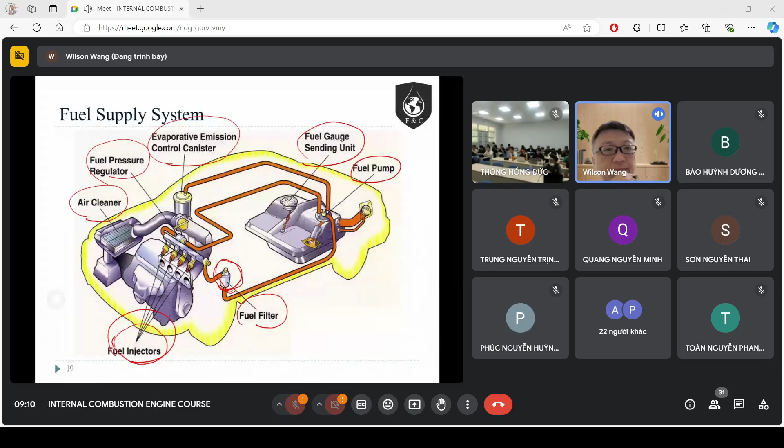And the injectors make sure the fuel can be atomized properly, because fuel has to be atomized properly in order to mix with the air, to have a good combustion. So that's the fuel supply system. And then the ignition system.

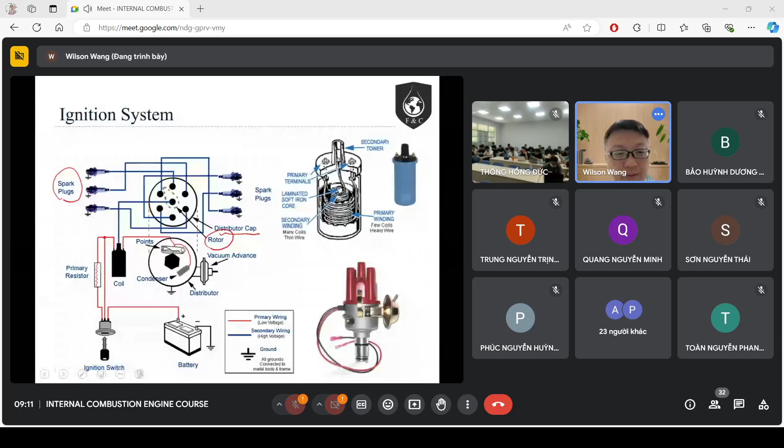So the ignition system includes spark plugs for the SI engine. And there's a distributor cap and rotors. That's the ignition system. And then the cooling system.

So most likely they have a downflow radiator, and there's a water pump, the coolant jacket. Then there's a thermostat, to tell you what the temperature is now, which you can see on the indicator in front of you. If you see the temperature is too high, it means your cooling system has some problems.

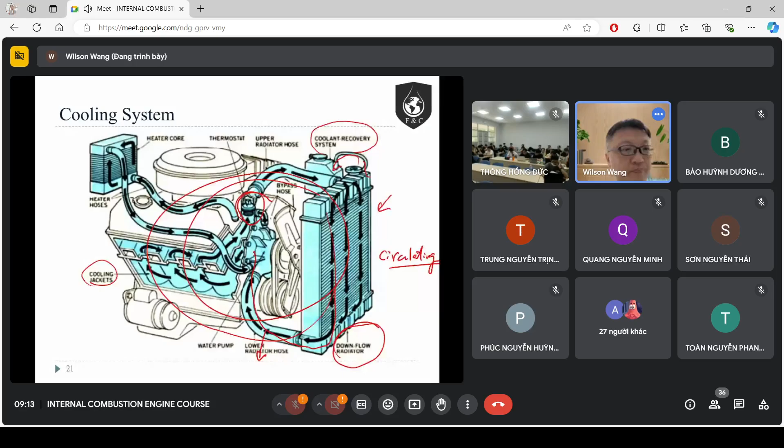The coolant is circulating. So mostly the coolant is running like this. So if you find your coolant has disappeared, it means there is some leakage from your cooling system. And another one is the lubricating system.

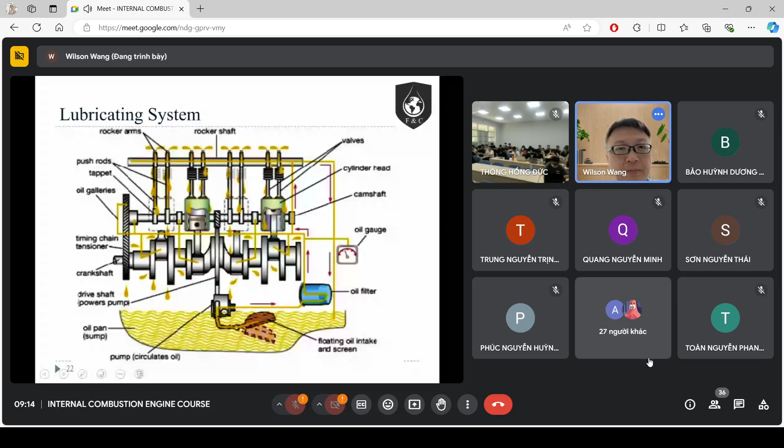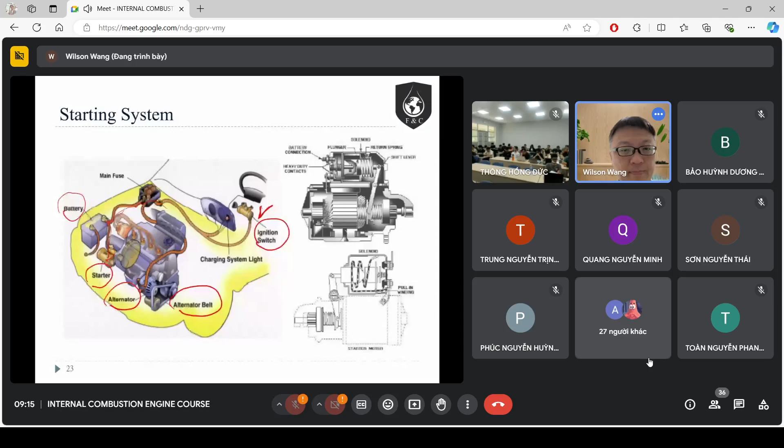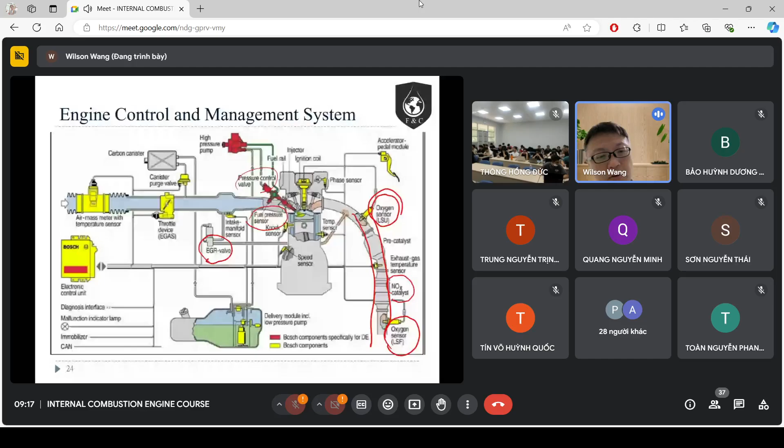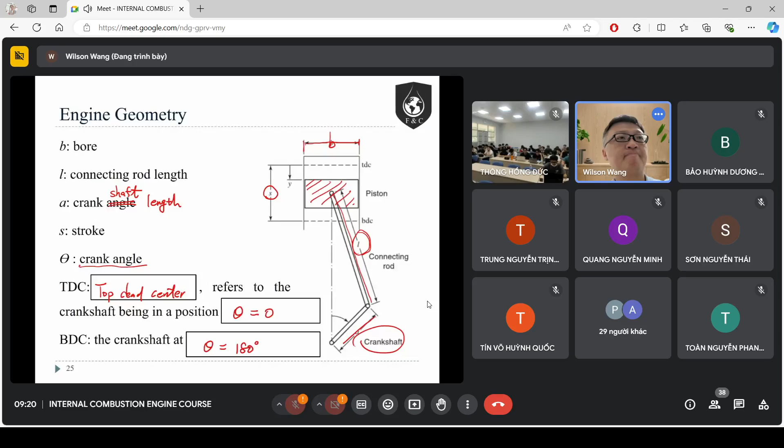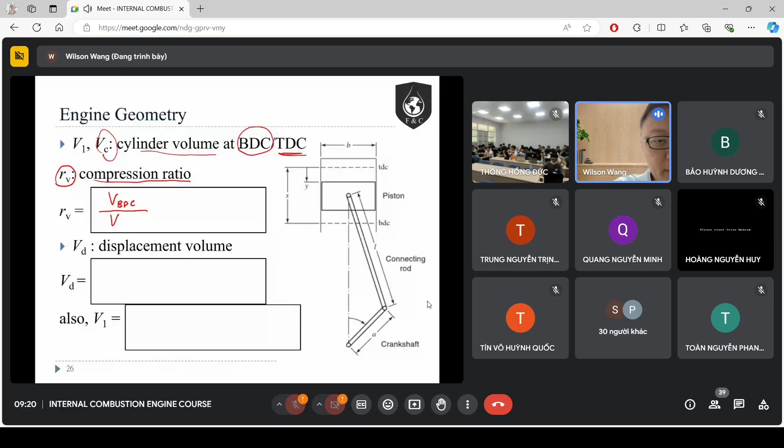Okay. So we have the V1, which is the cylinder volume at bottom dead center, and V sub C, which is the cylinder volume at top dead center. Okay. And we also define rv as the compression ratio. So this compression ratio is the volume at BDC divided by the volume at TDC, where the volume at BDC is V1 and the volume at TDC is V sub C. So that is our compression ratio.

And then we have V sub D, which we call the displacement volume. This displaced volume is the volume at BDC, bottom dead center, minus the volume at top dead center, which is the biggest volume minus the smallest volume. So this is the volume of the displacement. You calculate the volume of the cylinder: that is pi over 4 times B squared, where B is the bore, times the stroke.

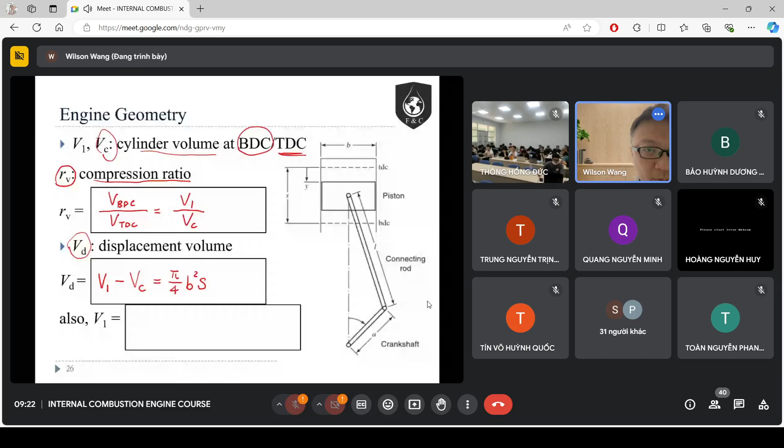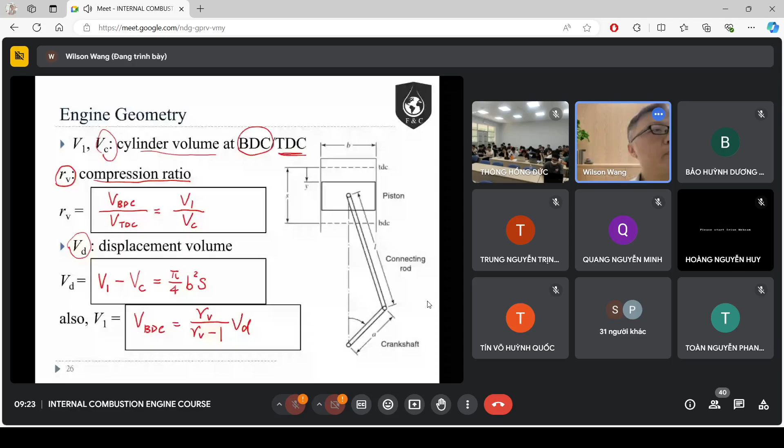Okay, also V1, which is of course V at BDC, is the compression ratio divided by compression ratio minus 1, times the displacement volume. And then N sub C represents the number of cylinders. So the total displaced volume is also equal to the number of cylinders multiplied by the displacement volume. So it's N sub C times pi over 4 B squared S.

And there's U bar P, the mean piston speed, which is 2 times N, the engine speed, times the stroke S. So the mean piston speed reflects that the piston travels a distance of twice the stroke per revolution. One stroke, two strokes, that's a revolution. So what is the speed it's traveling for this revolution? That is our mean piston speed. And omega is the engine frequency, which refers to the rotation of the crankshaft.

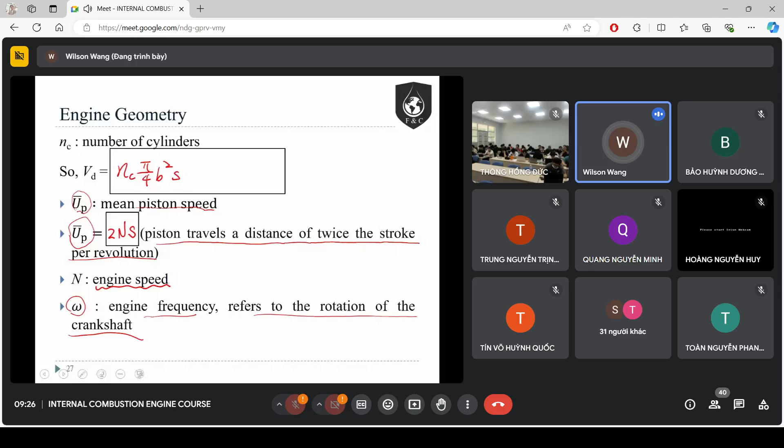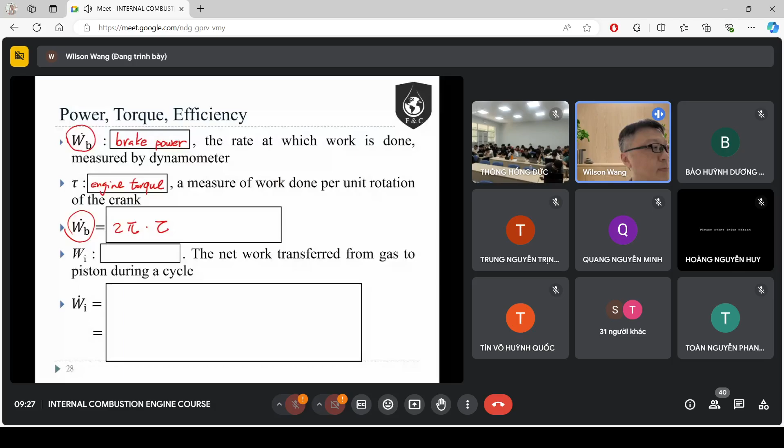Okay, then the power, torque, and efficiency. The power, W dot B, we call brake power. It's the rate at which the work is done, measured by a dynamometer. And tau refers to the engine torque. It's the measure of work done per unit rotation of the crank. So the brake power can be calculated by 2 pi times tau, the engine torque, multiplied by the engine speed, because torque is per unit rotation. So the engine speed multiplied by the work done per unit rotation multiplied by 2 pi. That is our brake power.

Okay. And there's WI, which we call the indicated work, the net work transferred from gas to piston during the cycle. For a four stroke, the indicated power is the number of cylinders multiplied by the indicated work multiplied by the engine speed divided by 2. If it's a two stroke, it's the number of cylinders multiplied by the indicated work multiplied by the engine speed. Okay.

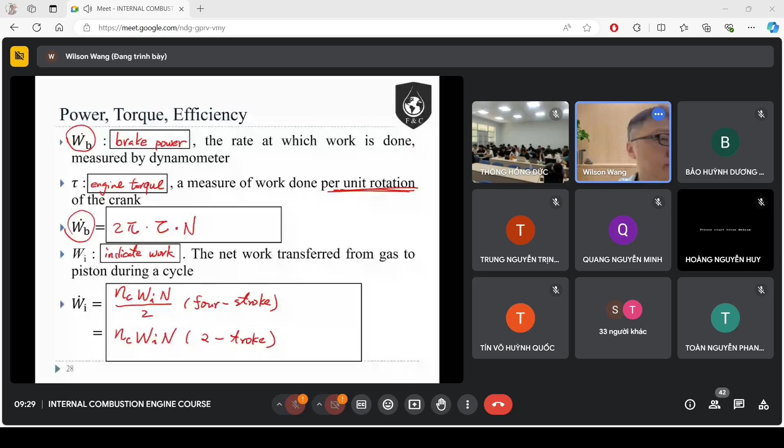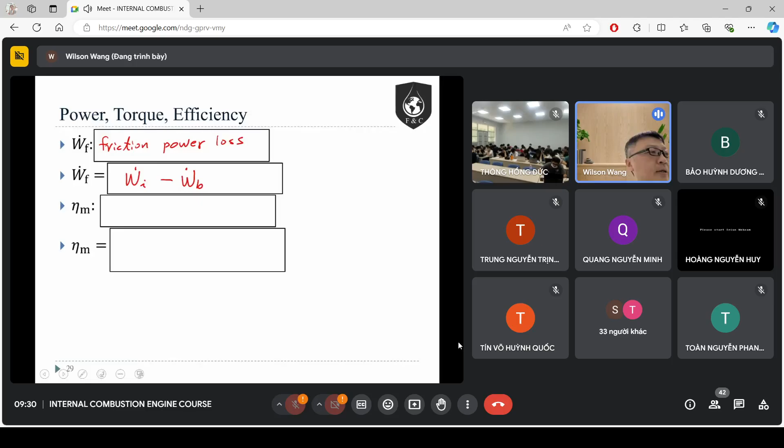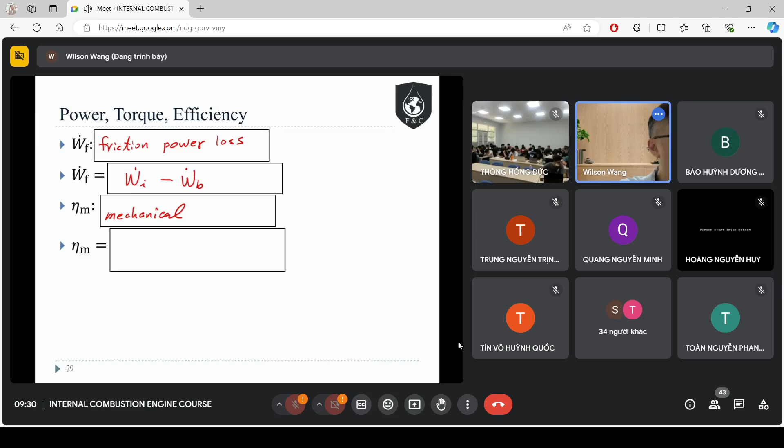We also have W dot F, the friction power loss. That is the indicated power minus the brake power. So the difference between the indicated power and the brake power is our friction power loss. And eta m is the mechanical efficiency, which is the brake power divided by the indicated power. The indicated work is the net work transferred from gas to piston during the cycle, the one you're expecting. The brake power is the rate at which the work is really done, measured by the dynamometer. So the difference is the friction power, a power loss. So this is also equal to 1 minus the friction power loss over the indicated power.

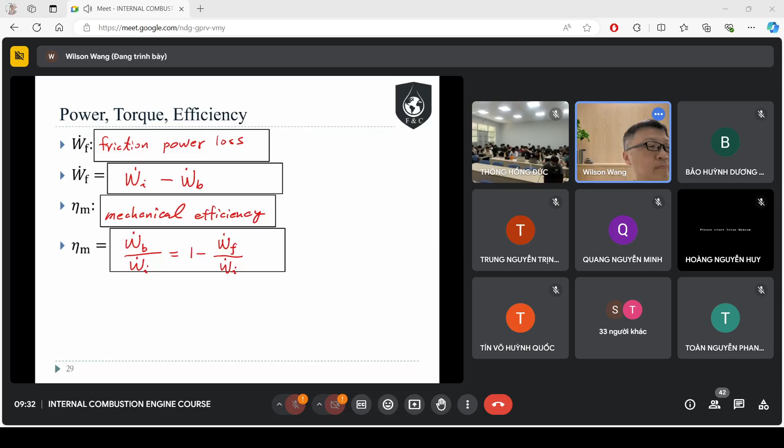And then there's the mean effective pressure, MEP. The MEP is the work done per unit displaced volume, in units of force per area. If it's the indicated mean effective pressure, which we call IMEP, it is the net work per unit displacement volume done by the gas during compression and expansion. That's the IMEP.

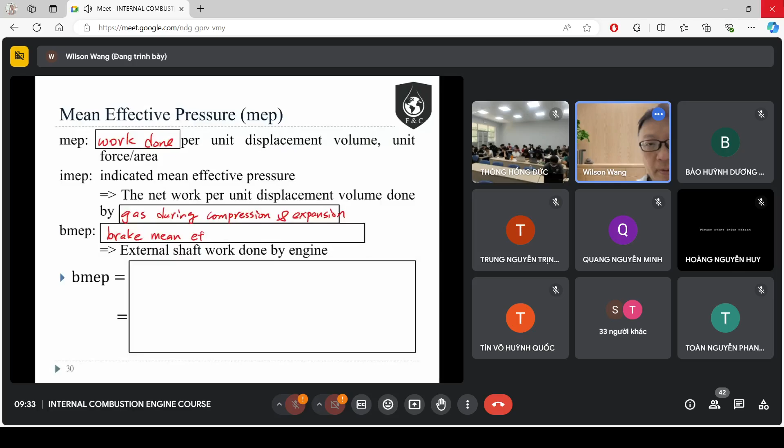Okay, then BMEP is the brake MEP, based on the external shaft work done by the engine. So for MEP, we have IMEP, the net work by the gas during compression and expansion, and if it's the external shaft work by the engine, it's BMEP. This BMEP can be calculated as 4 pi multiplied by tau, the torque, divided by the displacement volume. This is for four-stroke. For two-stroke, it's 2 pi times the torque divided by the displaced volume.

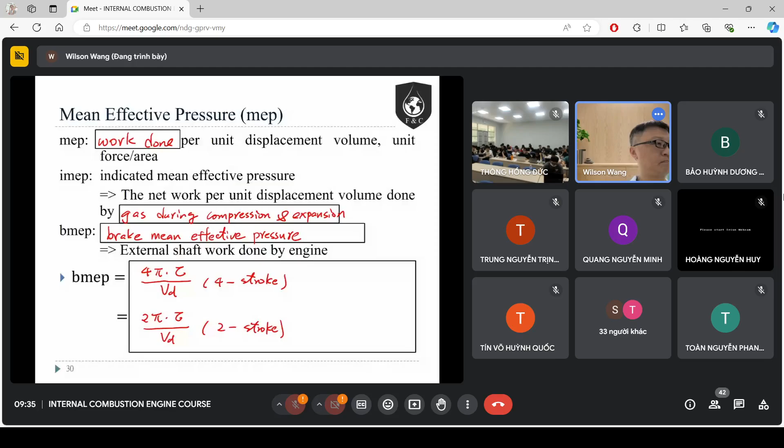Okay. So the BMEP for the four-stroke engine, I can also calculate it by the brake power divided by displacement volume times the engine speed divided by 2. This is for four-stroke.

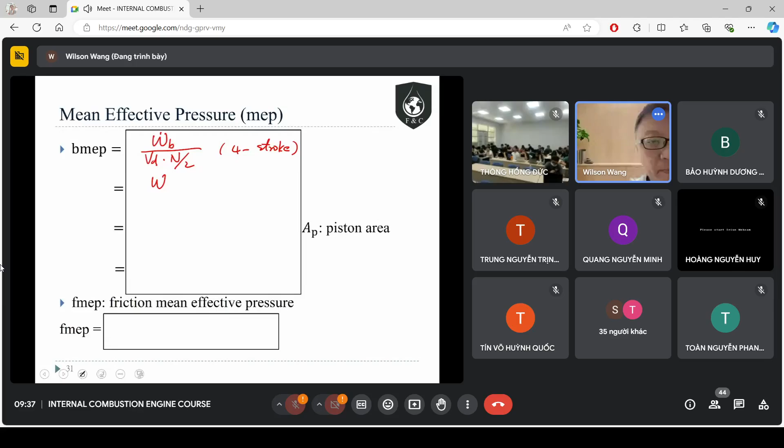Two-stroke, no divided by 2. So this is two-stroke. I can also calculate as 4 times the brake power divided by the number of cylinders, the piston area AP, and the mean piston speed. This is also for four-stroke.

Right? The distance the piston traveled multiplied by the piston area, that is the volume of the cylinder, right? And for two-stroke, two-stroke.

And of course, there's brake power, there's indicated power, there's friction power loss. Of course, for mean effective pressure, there's indicated mean effective pressure, there's brake mean effective pressure, there's friction mean effective pressure, right? So the friction mean effective pressure is the indicated mean effective pressure minus the brake mean effective pressure.

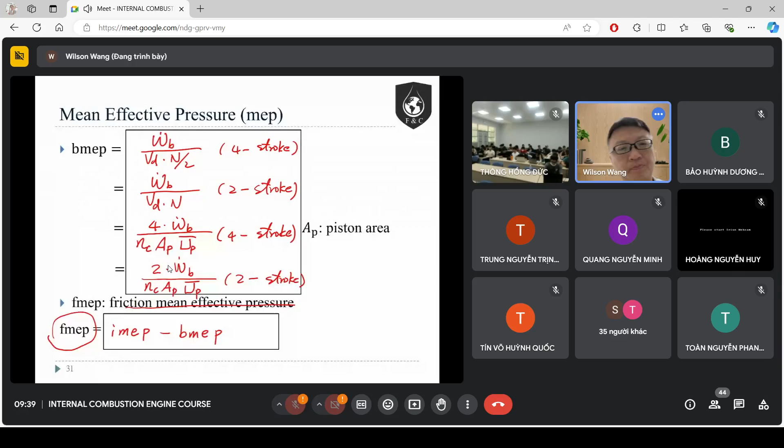So in terms of the engine performance test, there are three characteristics. Number one is the brake torque. Number two is the brake power. And number three is the brake specific fuel consumption. We also call it BSFC.

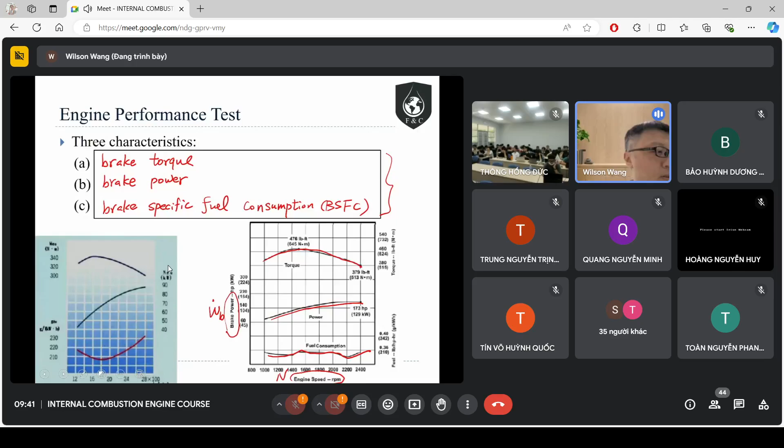And the power, the torque, and the speed can be measured by dynamometers. Sorry. People call them dynos or dynamometers, right? So there are three types of dynamometers.

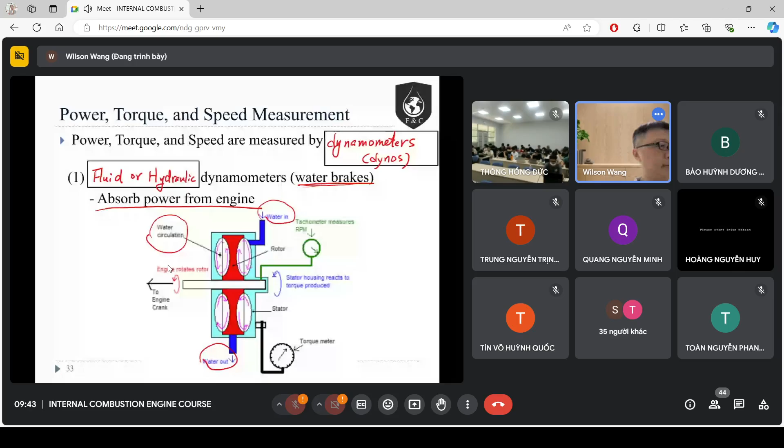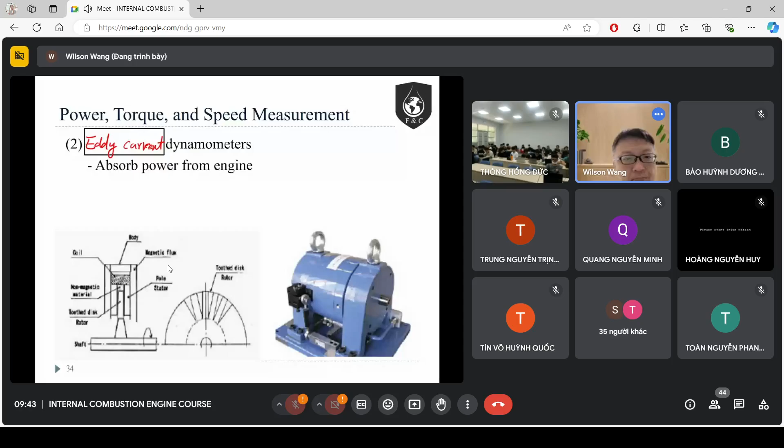The second one, which is quite a popular one, is the eddy current dynamometer, which absorbs the power from the engine as well. And number three is electric dynamometers, which absorb the power from the engine or deliver power to the engine.

So the hydraulic or eddy current dynamometers only absorb power from the engine. But the electric dynamometer can also deliver power to the engine. Okay, that's different from the other two. So I can use it to motor the engine to measure the friction power. And normally we use AC electric dynos. AC electric dynos are newer and respond faster.

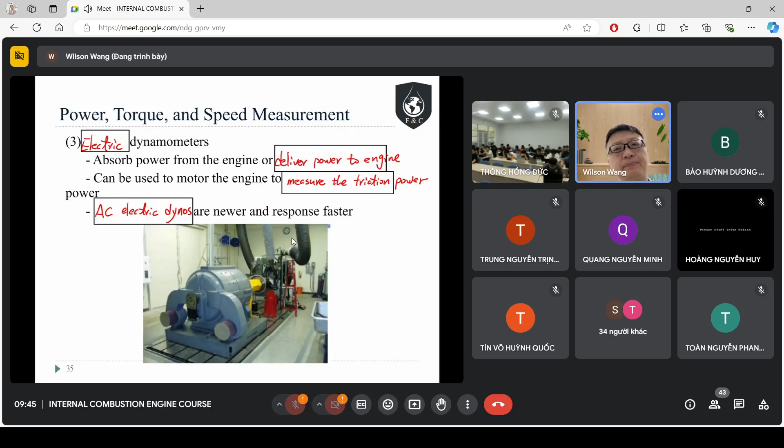The dynos are for power, torque, and speed measurement. If you want to measure the BSFC, the brake specific fuel consumption, the measurement includes two types. Okay, you can measure by mass, or you can measure by volume.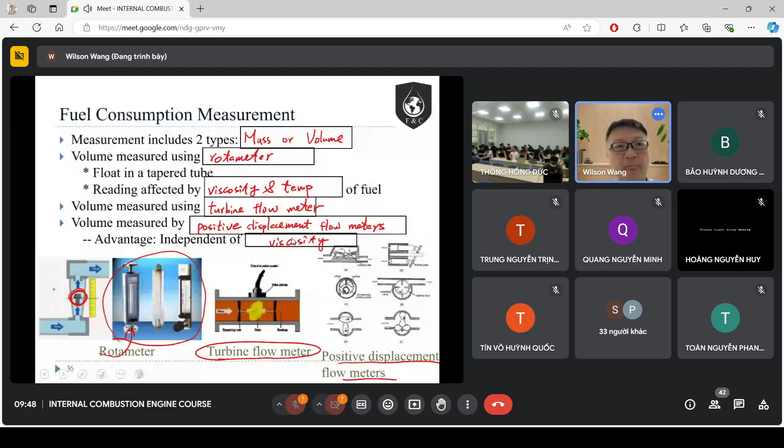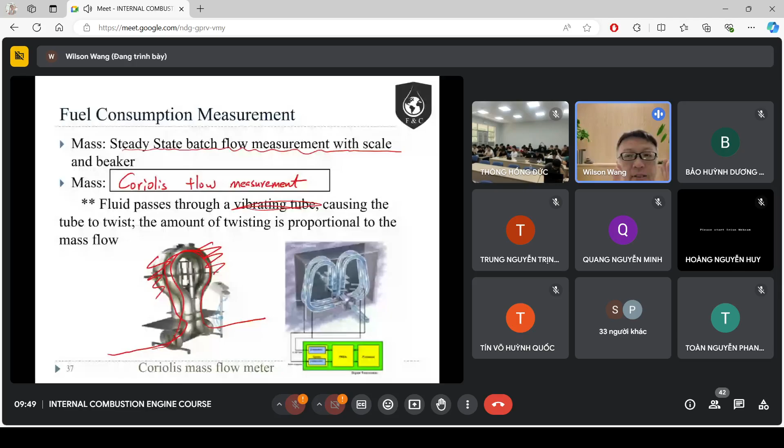So you can see the fuel flowing through. When the fuel flows through, there will be a vibration in the tube. Okay, the tube will twist, right? And the amount of twisting is proportional to the mass flow. We use the amount of twisting to sense the mass of the fuel. We call it the Coriolis flow meter.

Okay. I think this is it for this hour, and maybe we have a 10 minute break. We have a 10 minute break, and we come back by 11. Okay.

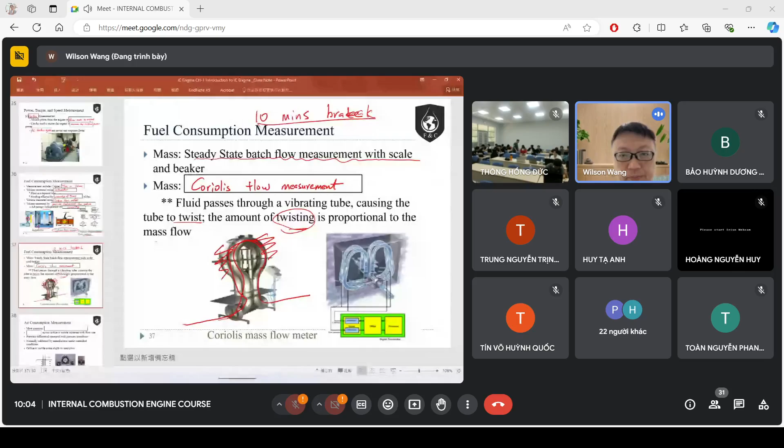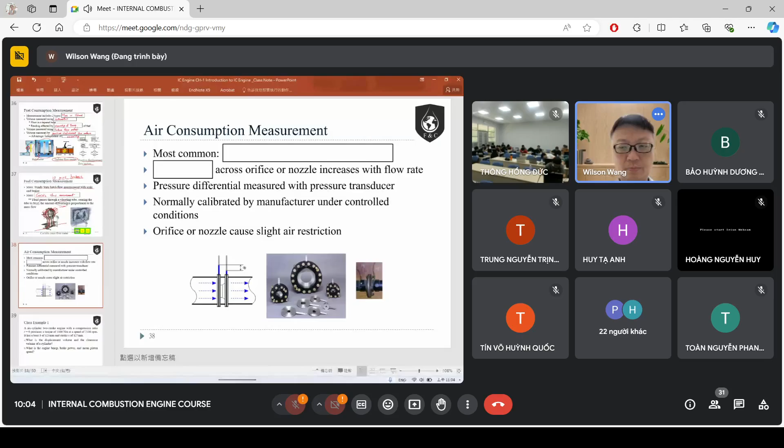Okay, we continue on the class. So if you want to measure the air consumption, okay, the most common one we use is the calibrated orifice or nozzle.

And the orifice or nozzle, what they are trying to do is they set up an orifice, okay, across the flow. I mean, make the flow close. And they measure the pressure drop. Okay, then the pressure drop, the dP, the pressure drop across the orifice increases with the flow rate. Okay, and the pressure difference is measured with the pressure transducer. Normally calibrated by the manufacturer under controlled conditions.

Okay, the orifice or nozzle causes slight air restriction. So you have the flow flowing through and causing the pressure drop, and this pressure drop reflects the flow rate. So you can know what is the air flow rate, how much air is consumed.

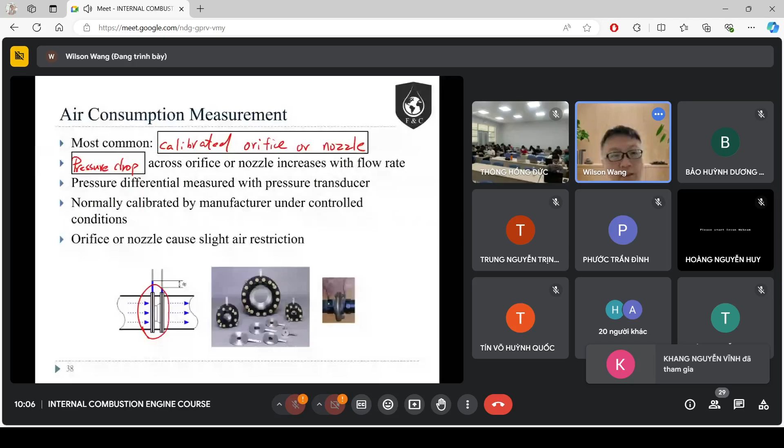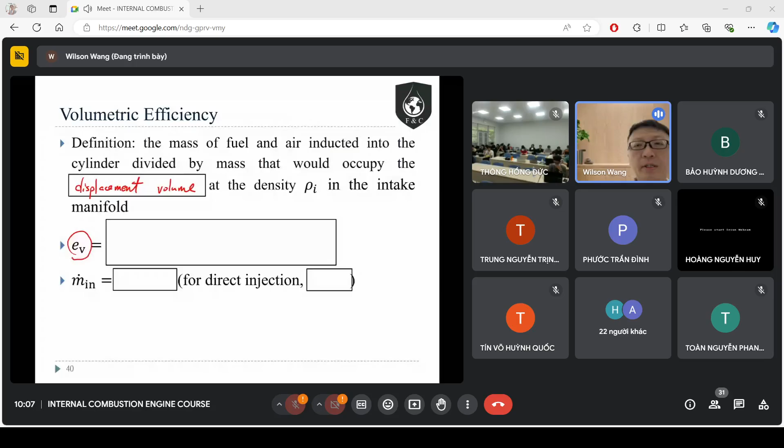Okay, so the volumetric efficiency is going to be the mass of fuel and air. So let's say mass in, the mass flow rate of the fuel and air inducted into the cylinder, divided by the mass that would occupy the displacement volume. So the displacement volume, okay, multiplied by the density and engine speed divided by 2. This is for 4-stroke.

Okay. The density rho i is the one that occupies the displacement volume. Okay, so the mass of fuel and air getting into the cylinder does not necessarily occupy all the displacement volume. Okay, so how much it occupies is the volumetric efficiency. And this mass in is the mass of the air plus the mass of the fuel. But for direct injection, we only consider the mass of the air. So the mass of the fuel, we have to consider as zero.

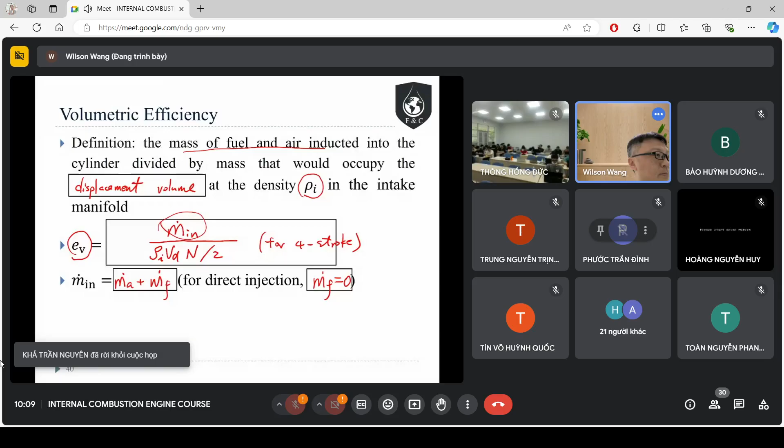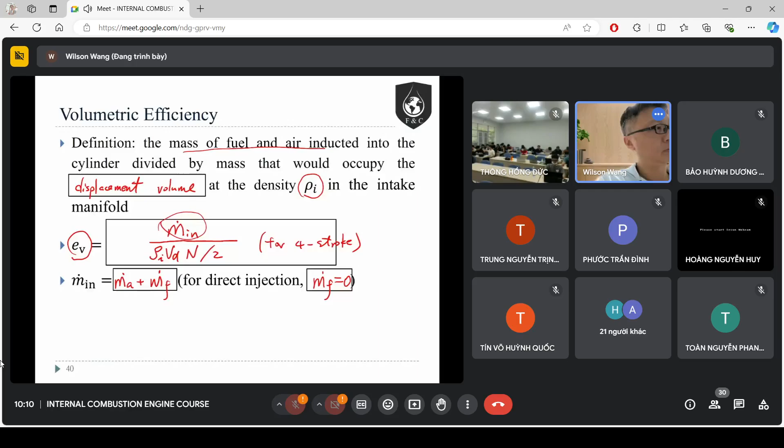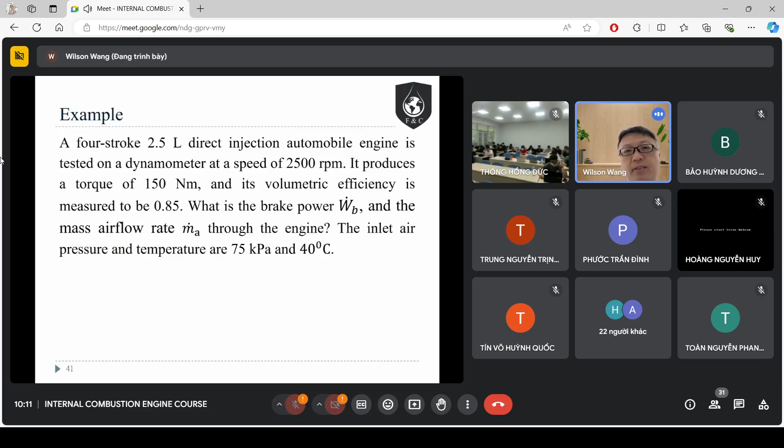And we know this is direct inject, right? It's already telling you this is a direct inject. So we only consider the mass of the air for this. All right. Density, the displacement volume, engine speed by 2 for four-stroke engine.

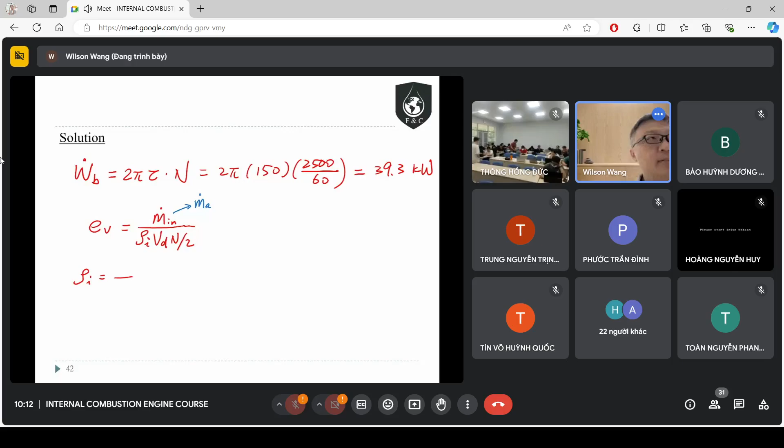We look at the density. How to calculate density? We do the ideal gas law. So P by RT. Okay, and this is equal to 0.85. All right. So we know the engine speed and we know the displacement volume. We know the density, right? Equal to 0.85, 85%. So we can calculate the mass flow rate of the air. Okay.

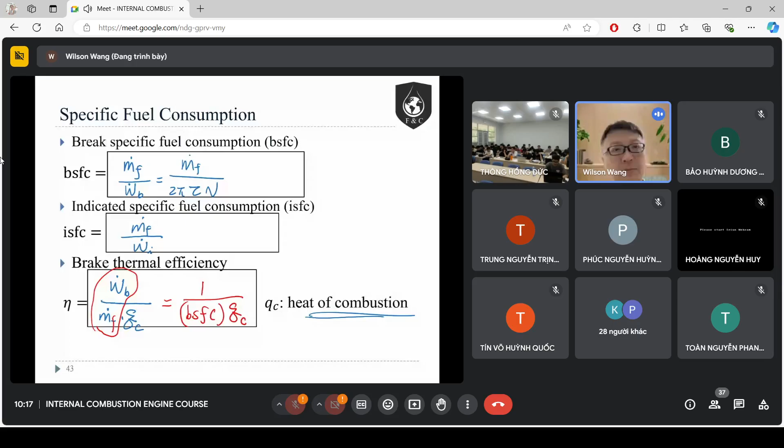We look at one example. A 6-cylinder 4-stroke automobile engine is being designed to produce 75 kilowatts at 2,000 RPM with a BSFC of 300 gram per kilowatt hour and BMEP of 12 bar. The engine is to have equal bore and stroke and is fueled with gasoline with a heat of combustion of 44.5 megajoule per kilogram.

So 44,510 is the 44.5 megajoule per kilogram. So what should be the design displacement volume and bore? Number 2, what is the mean piston speed at the design point? And what is the fuel consumption per cycle per cylinder? And what is the brake thermal efficiency?

So it's telling you the BMEP is 12 bar. The BMEP is the brake power divided by the displacement volume, engine speed divided by 2.

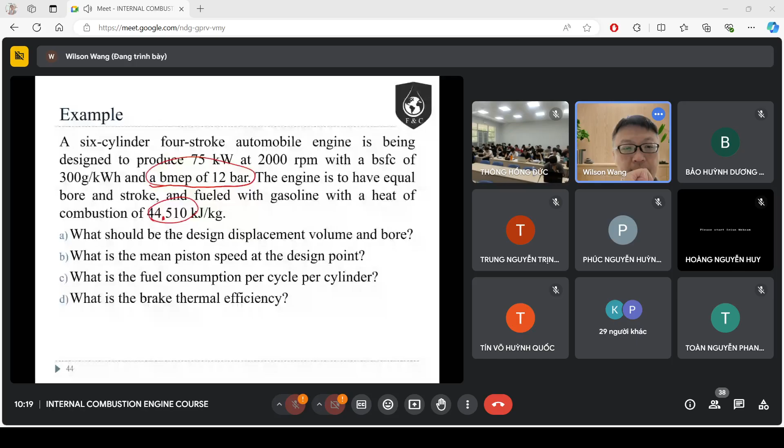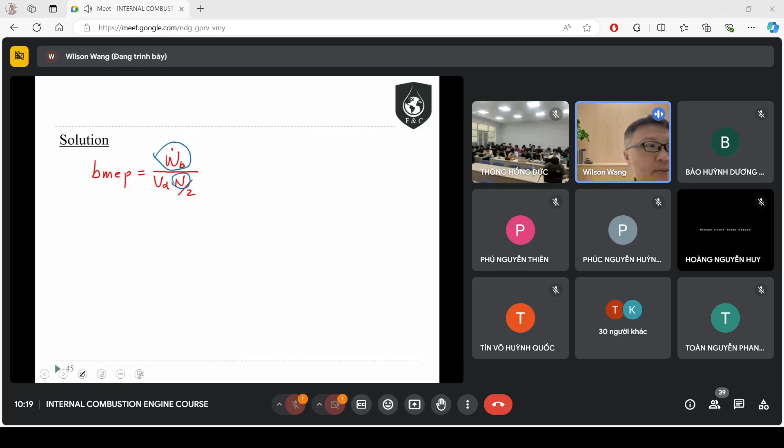The brake power is 75 kilowatts, engine speed is 2000. So this one we have, this one we have, and BMEP is 12 bar. So I can calculate the displacement volume to be 3.75 liters.

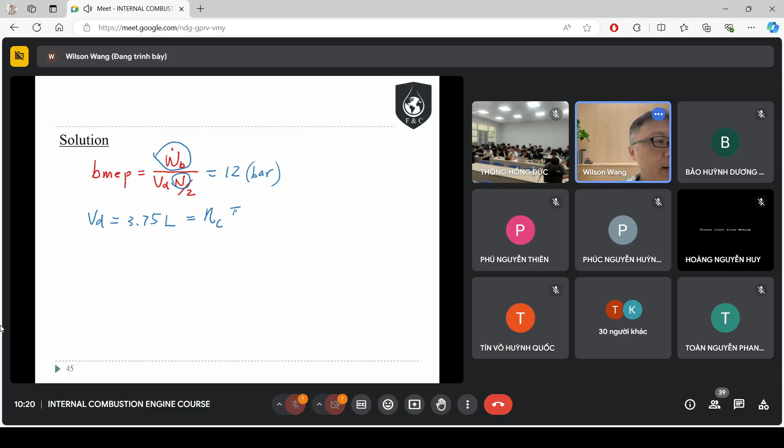This is equal to the number of cylinders, how many cylinders we have, multiplied by pi over 4, the bore square, multiplied by stroke. The engine is to have equal bore and stroke, the B and S are the same, which means I can have like this. 6 cylinders.

So I can calculate a bore equal to 92.7. This is also equal to the stroke. So the mean piston speed is 2 times the engine speed times the stroke, right? So I have the engine speed, I have the stroke, so I can calculate.

And then the fuel consumption per cycle per cylinder. So BSFC is the fuel consumption, I use a bar meaning per cycle per cylinder, divided by the brake power. And this is equal to 300 gram per kilowatt hour.

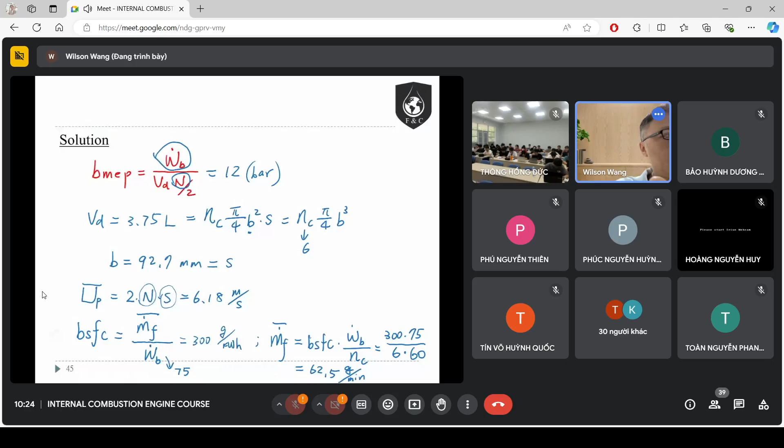So that will be 62.5 gram per minute. That is per minute how many fuels is injected, per minute how many fuels is injected.

62.5 gram of fuel is injected, divided by engine speed divided by 2, so that is the fuel injected per cylinder per cycle. Because we already divided by 6, we already know the fuel injected per cylinder, and we divided by engine speed by 2 per cycle. So that will be 0.0625.

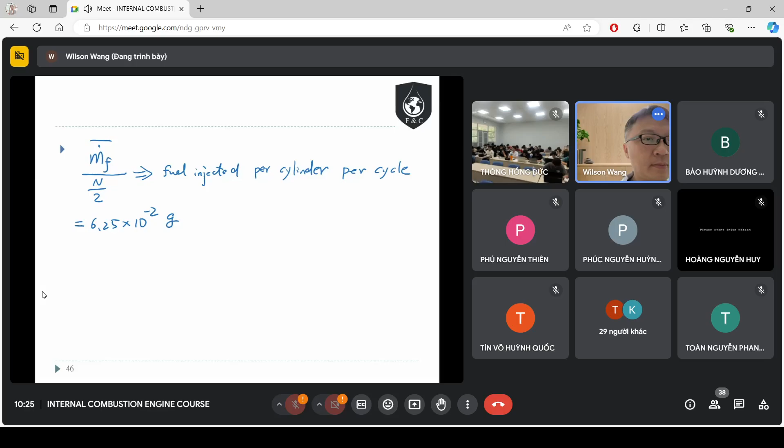And then the last one is the brake thermal efficiency, which is 1 over BSFC times the heat of combustion. So that is 27%.